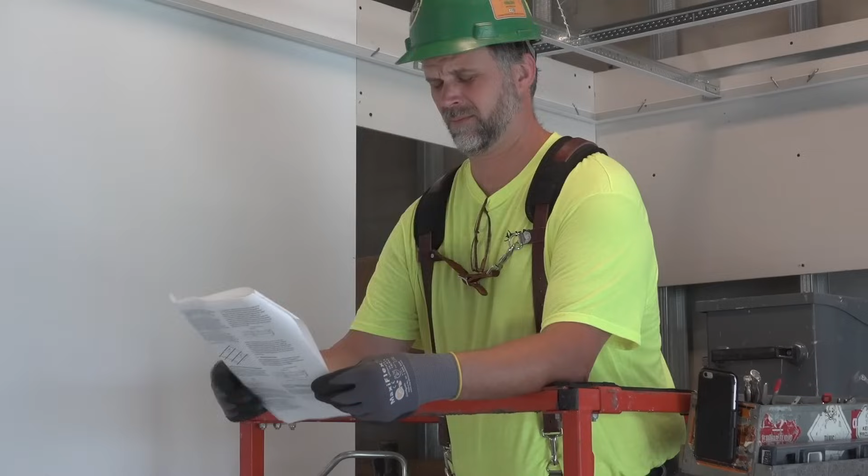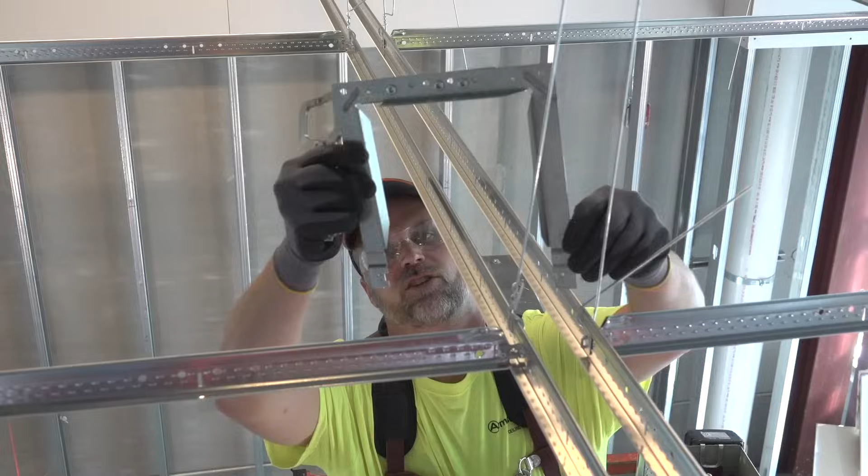Armstrong Optima and LYRA Concealed panels integrate with a fully concealed 15/16" suspension system while creating smooth, monolithic visuals combined with plenum accessibility. As a supplement to your installation instructions, this video should help you understand the intricacies when it comes to successfully installing Optima or LYRA Concealed. A little extra attention is needed when installing this tighter tolerance monolithic ceiling system.

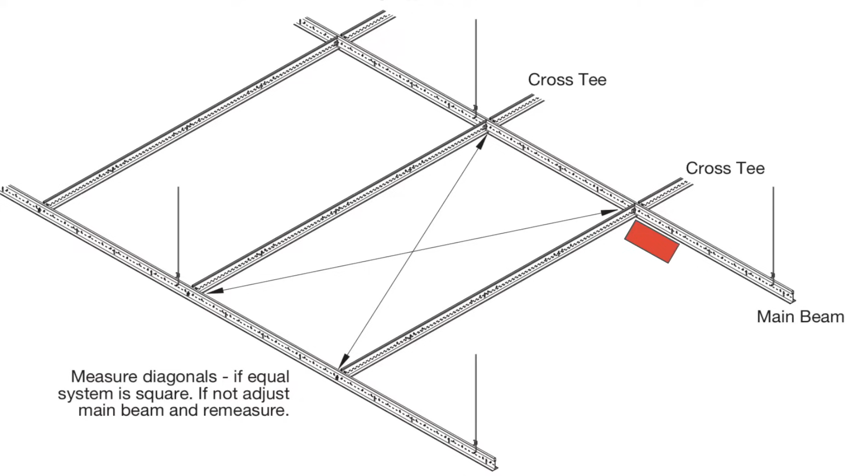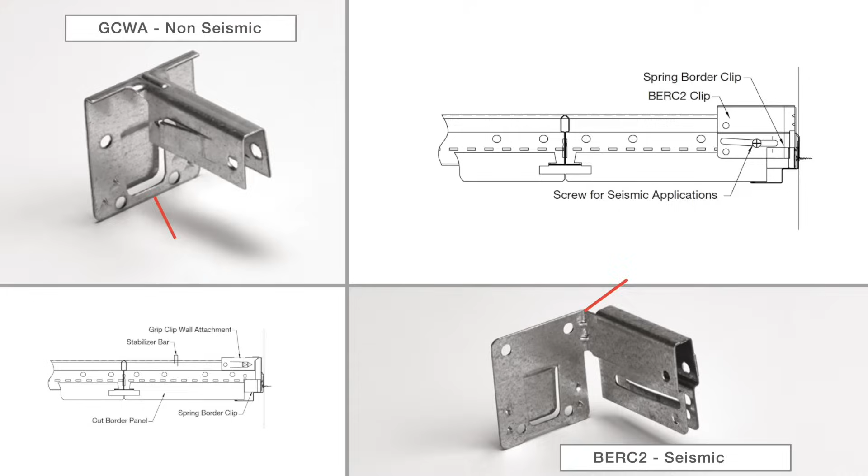First, hanger wires must be perfectly plumb to prevent the rocking of main runners, which will magnify poor panel alignment. You will also need to pay closer attention while leveling your grid system to a maximum of 1/4 inch within 10 feet. Modules will need to be square to within 1/16 inch in 2 feet. Use the GCWA in non-seismic and the BERC2 in seismic installations. These clips will secure and elevate your grid face 1/2 inch above the face of your shadow molding.

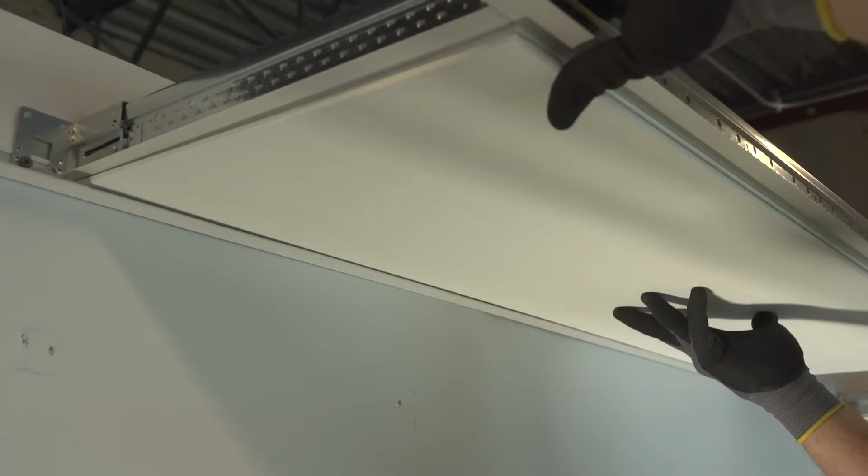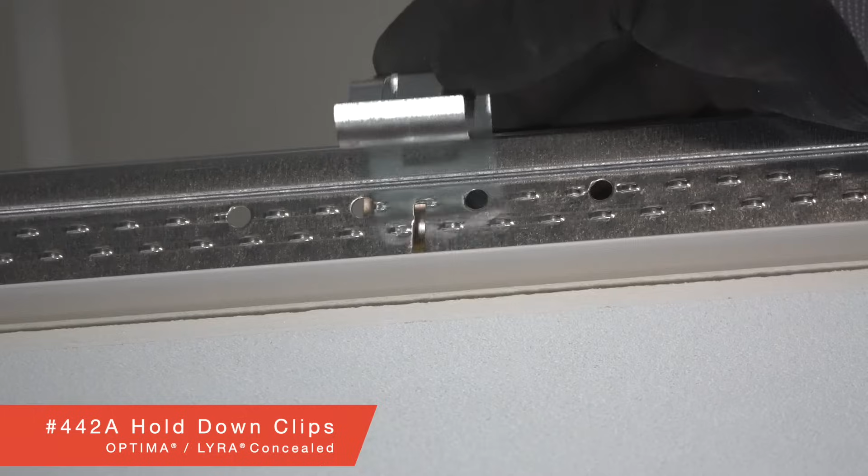This will allow square cutting of your borders with no need for field cutting a 1/2 inch reveal at the perimeters. If you would rather install standard 7/8 inch wall angle, just make sure you account for this same 1/2 inch grid to angle depth difference. Install one hold-down clip per panel at the midpoint of each quick kerf edge. This clip will keep your panel tightly aligned while still allowing plenum access.

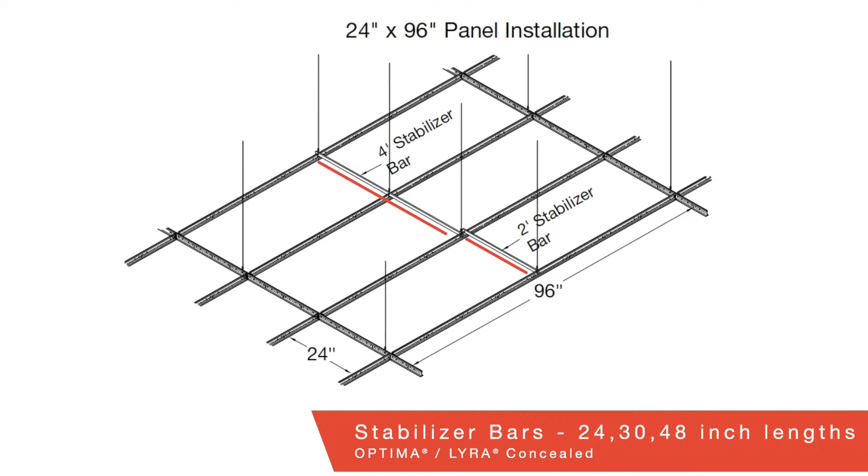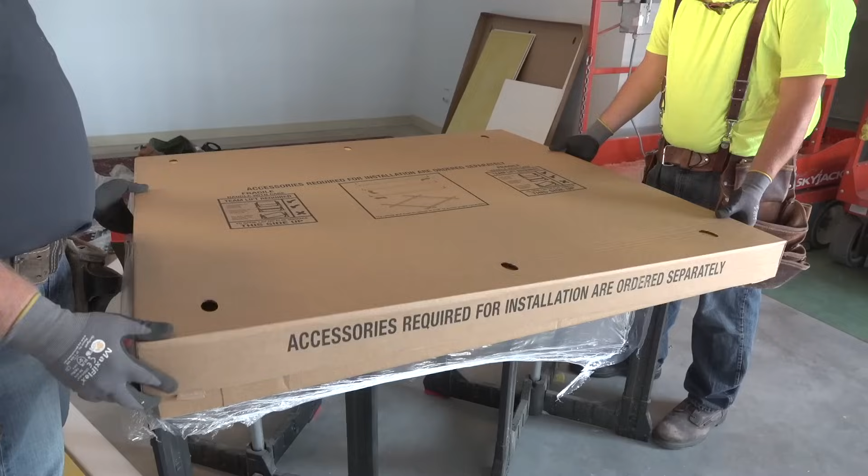Stabilizer bars are required for all border panels, while also necessary for all field panels 60 inches or greater in length. Pay particular attention to specific team lift requirements that are dependent on the length of the panel you are transporting and installing. Let's address the installation of your perimeters first. Key accessories are necessary for creating that monolithic panel-to-panel visual at the perimeters.

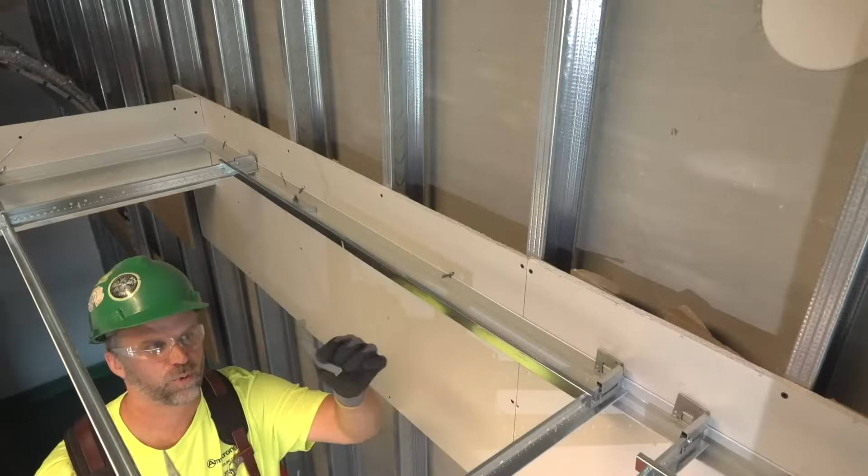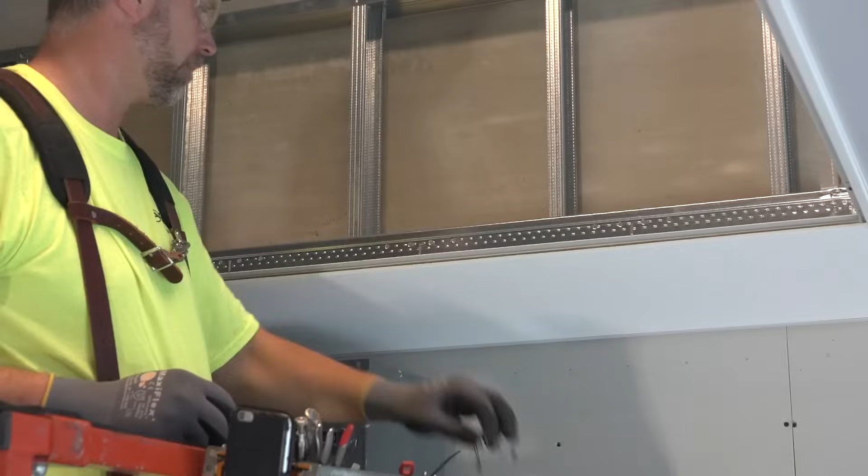In addition to your perimeter stabilizer bars, you will need to install one spring border clip for every 2 lineal feet of border panel. These clips push the panel away from the wall to ensure the panel's single quick kerf edge is seated tightly, which will prevent panel disengagement. Finish up by pre-installing your hold-down clip at the T's midpoint.

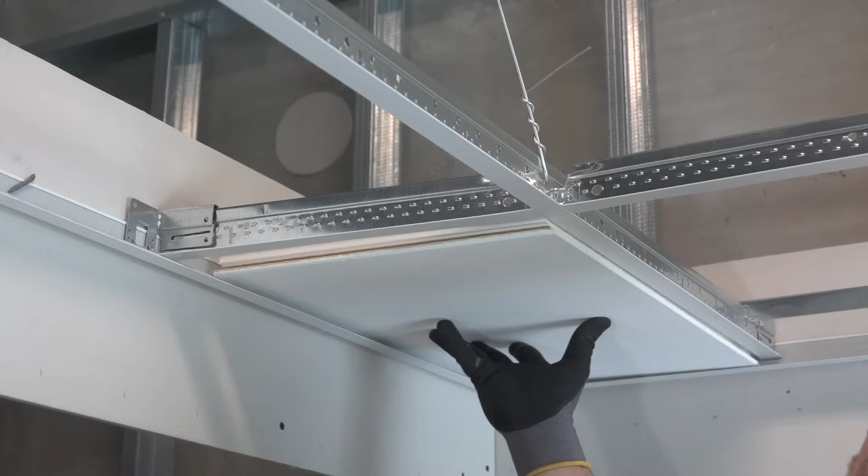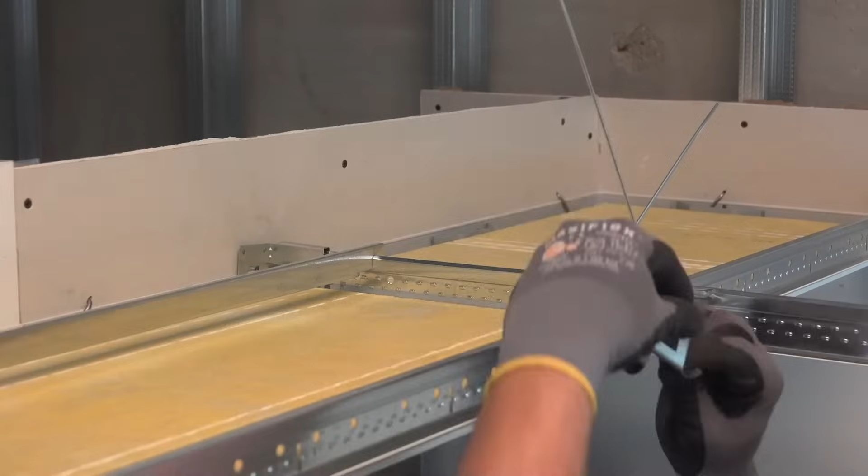Installation of your keystone corner panels is simplified by sliding your border T away to allow for easy quick kerf panel to T engagement. You will need to install spring border clips on both sides at your corners. Then follow up with a hold-down clip where both quick kerf edges engage your corner T. Your 2 quick kerf edges are located down the long sides of your rectangular panels.

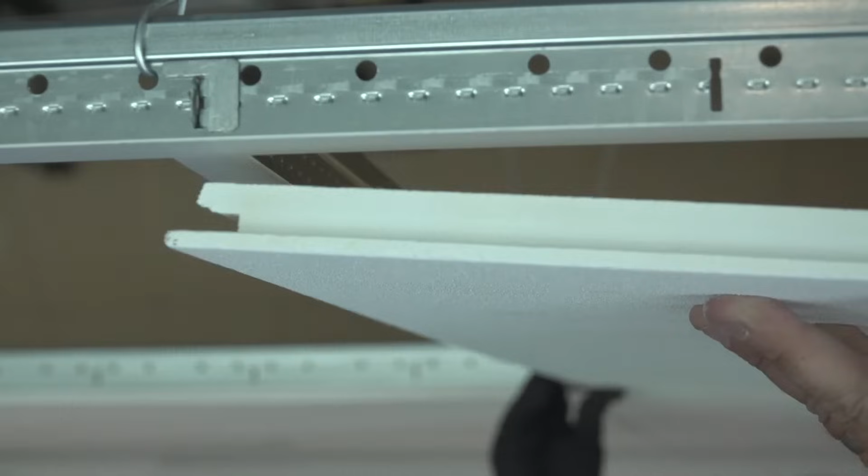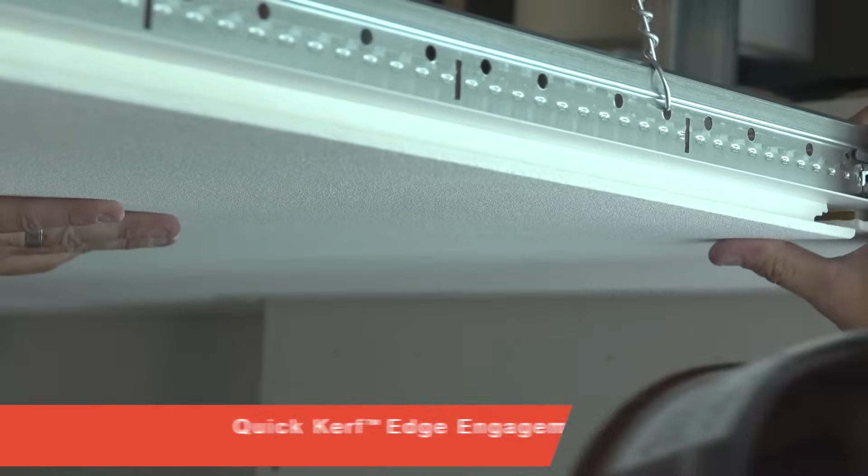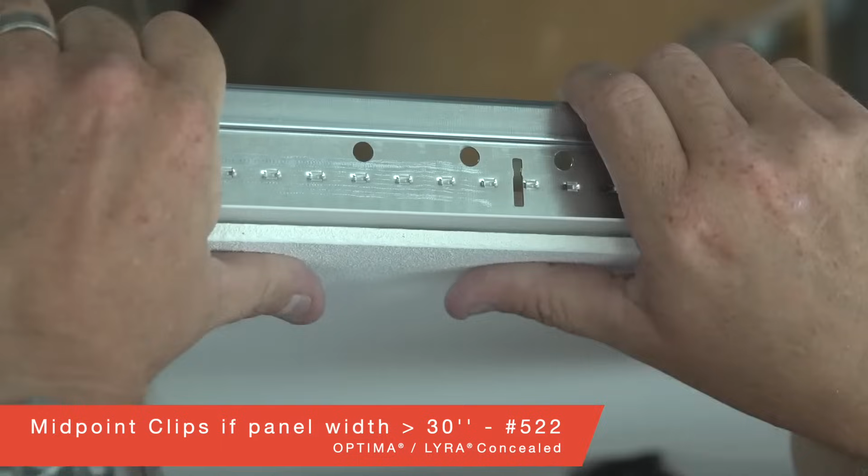Panels install from below the grid with quick kerf edges aligned in the same direction, which ensures access consistency. It's best to have 2 installers for larger panels. Tight panel-to-panel tolerances require just a little more time and attention to detail. If the width of your panel along the 2 unsupported edges is greater than 30 inches, you will need to install midpoint clips. These engage the grid and secure these reverse tegular unsupported edges.

Again, for larger panels, 2 installers are recommended. Here we're engaging the 2 quick kerf edges as we diagonally raise the panel into place. Next, we're engaging the midpoint clips to secure the 2 unsupported reverse tegular panel edges.

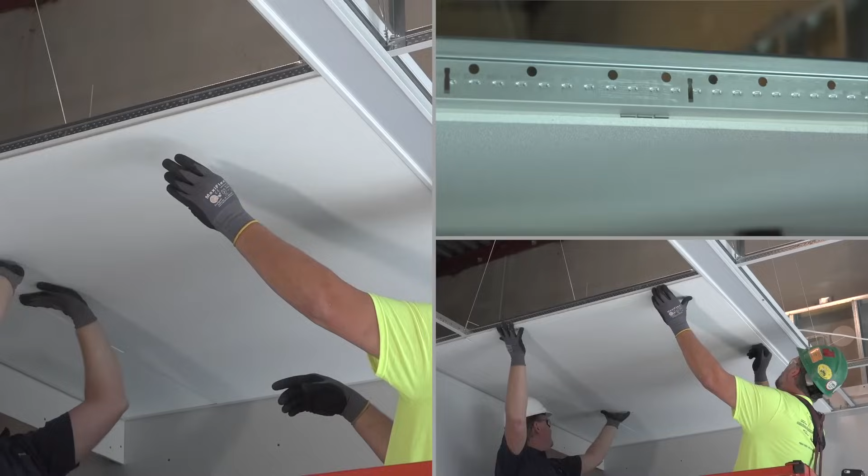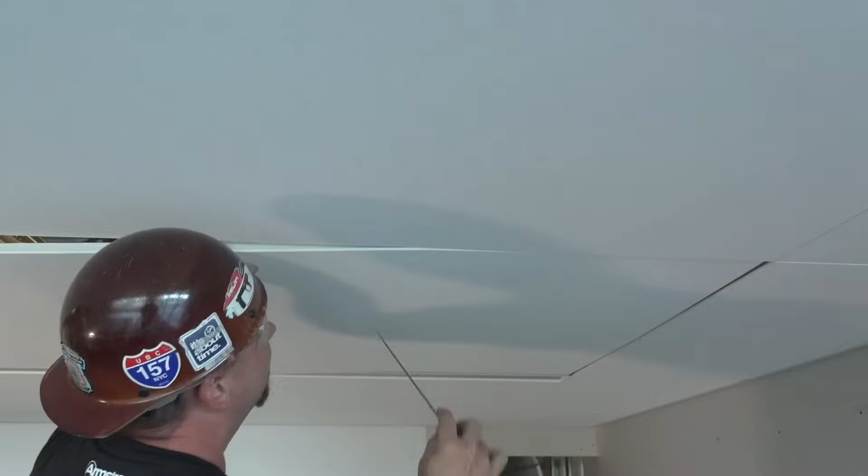To remove panels, first locate the 2 quick kerf edges by finding the 2 sides that raise up the most when pressed. With clean hands, press up and slide towards the grid to disengage the opposing quick kerf edge on the opposite side of the panel. Now, your 2 midpoint clips will prevent your panel from totally disengaging until you release them with a flat bar or putty knife.

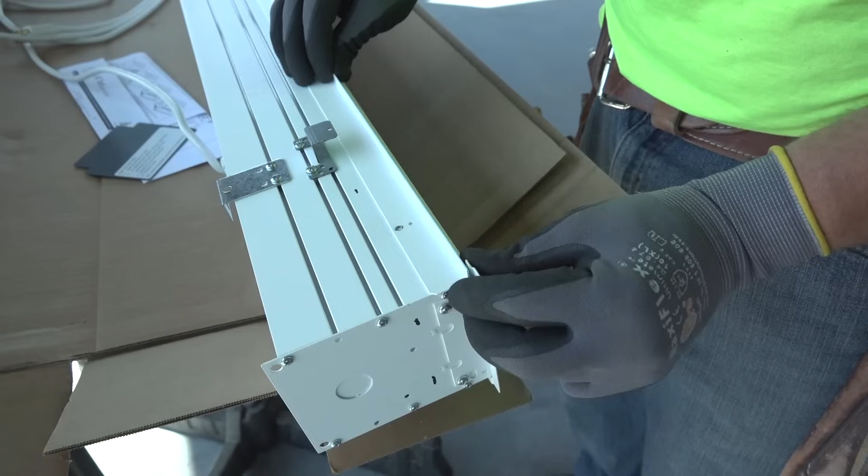It's best to run all mechanicals within a Techzone grid layout. Panel penetrations are possible, but if fixtures engage the panel in any way, panel-to-panel alignment will become increasingly difficult. We are taking the added step of raising this fixture's trim 1/2 inch so the face of the fixture will flush out with the panel's face once installed in the Techzone. The fixture's width is 4 1/16, so we need to ensure the flange-to-flange opening in the Techzone allows for this.

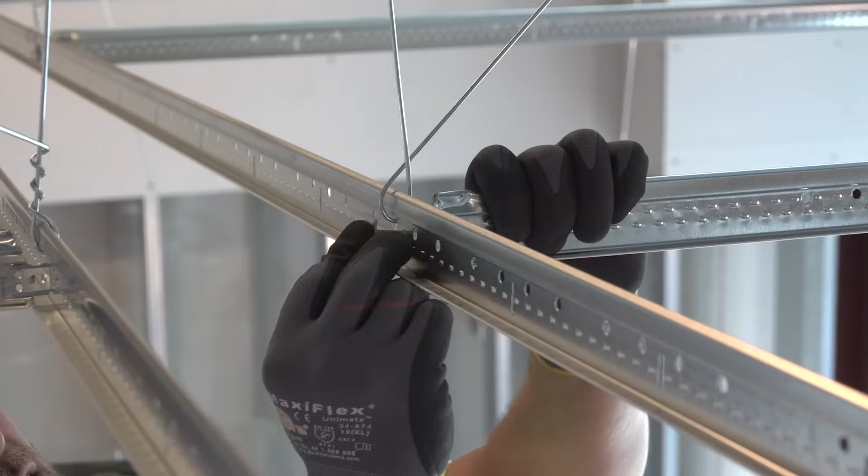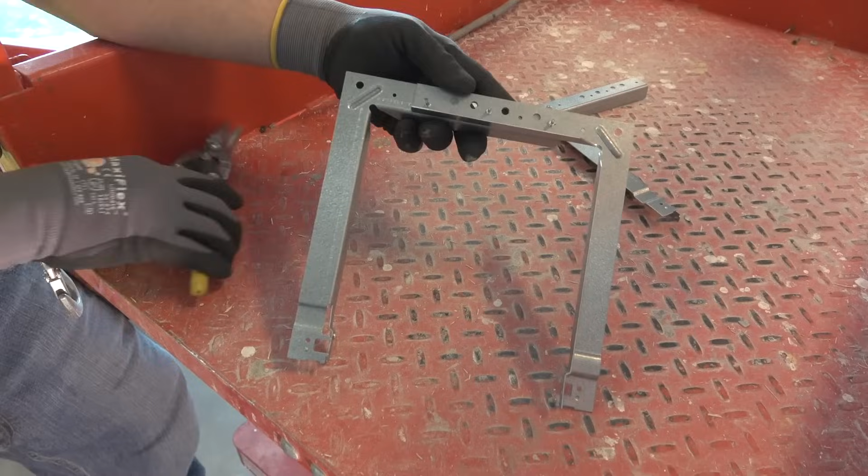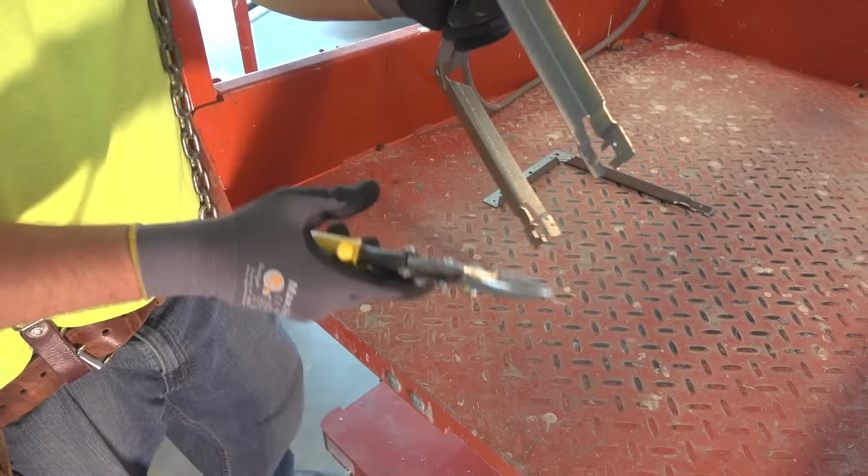STAC clips secure Techzone's unopposed cross-tees while preventing cross-tee disengagement, which is more secure than simply butterflying cross-tee tabs. Here we are going to modify our Techzone yoke. Think of the yoke as a U-shaped cross-tee that joins long continuous module runs. We are giving this yoke a 7-inch opening, then cutting off a few tabs that will not be needed in this simplified installation.

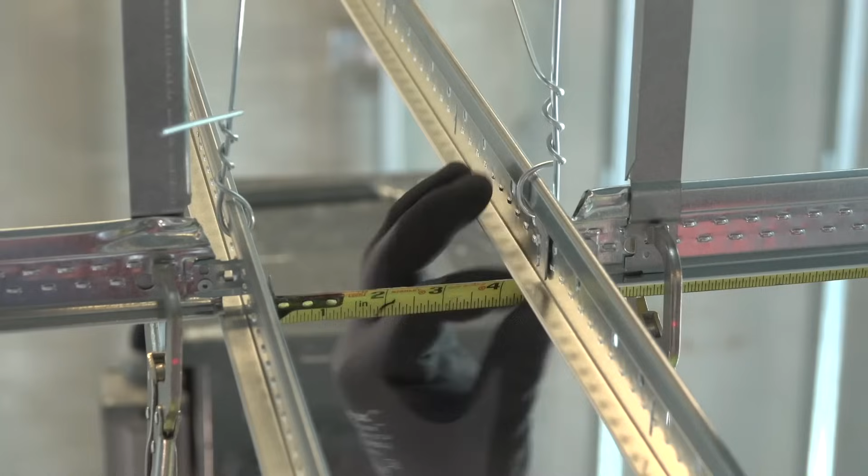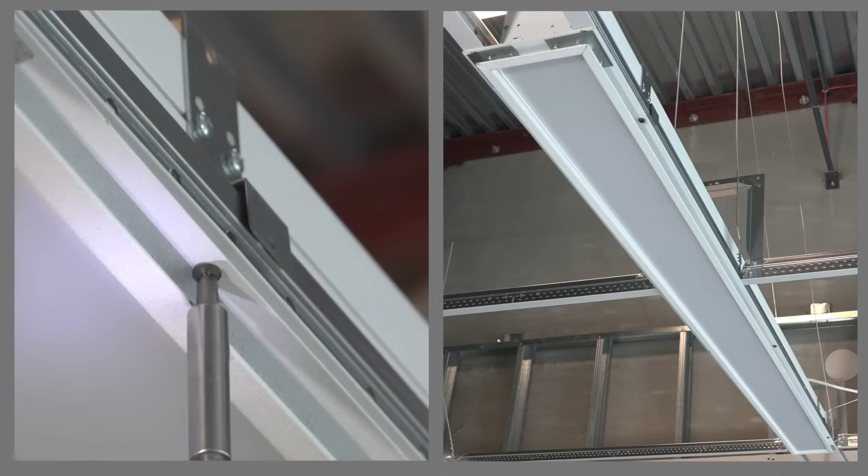After C-clamping the yoke into place, we adjust as needed to create and maintain our 4 1/16 inch grid flange-to-flange opening, which the fixture we measured earlier requires. When integrating MEP into the Techzone, the use of a fixture trim kit is recommended to maintain a consistent visual. These ship in 5 sizes to simplify framing out all types of Techzone layouts. Just attach to the grid with a sharp point framing screw through the pre-drilled holes.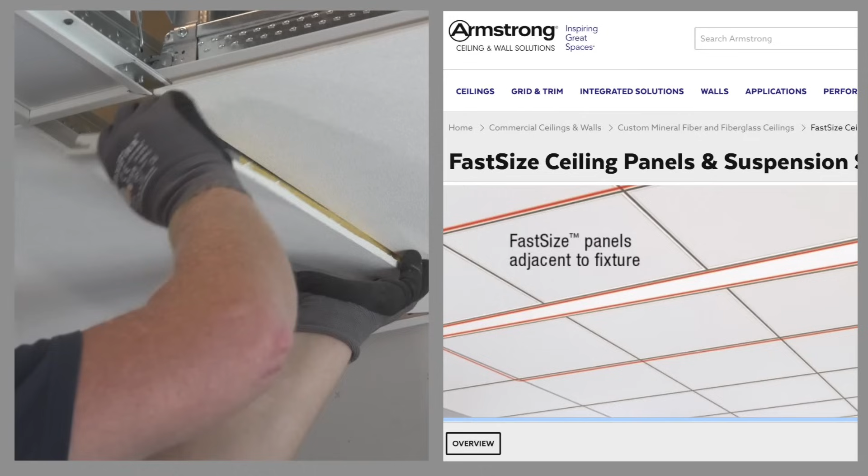When installing along the fixture trim, engage the reverse tegular edge to your trim first, then navigate the quick kerf edge to the T-flange. To fill in unused TechZone space, order FastSize concealed panels which are made to your specifications. If you must field cut special-sized panels, you need to be very precise to ensure your field cut panel is as close to factory panel visuals as possible.

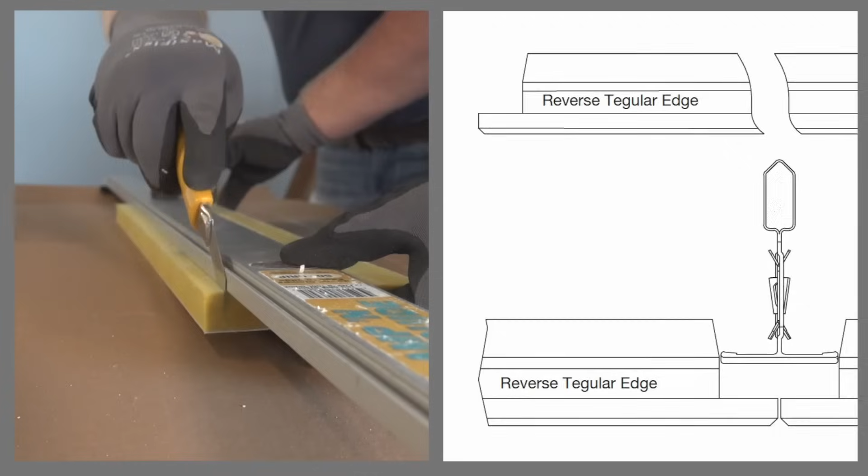Field cuts will never be perfect, but with extra labor and skill, they are achievable. To finish off your reverse tegular edges, use Armstrong Supercoat touch-up paint, then let dry and install. The application of midpoint clips will serve to create a ledge for the panels to rest opposite the quick kerf on the other side of the panel.